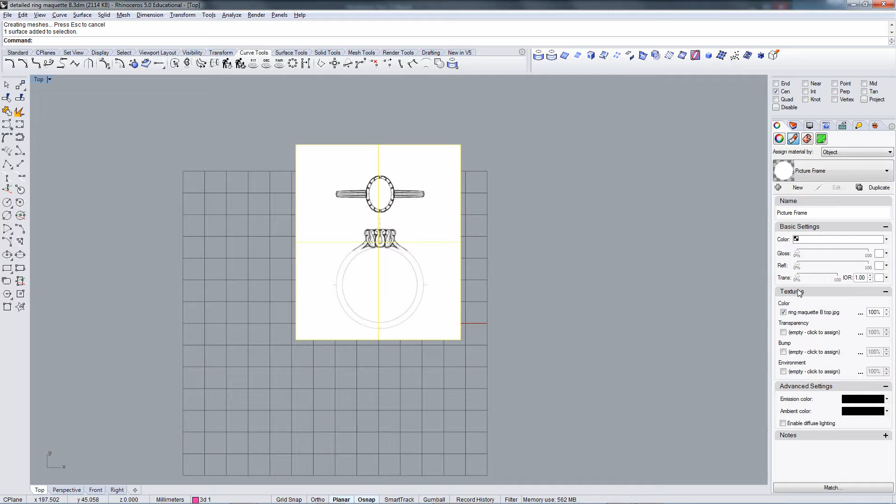Shift key, drag left to right, bring it in. Object properties, select it, go to materials, slide transparency up to 90%, more or less. And we're good to go. I need to center it. Also need to pick a layer for it. I don't want to use my magenta layer. I usually like to put my picture frames on a layer I don't like to use much for modeling. And that chocolate brown is a layer I'm not that fond of.

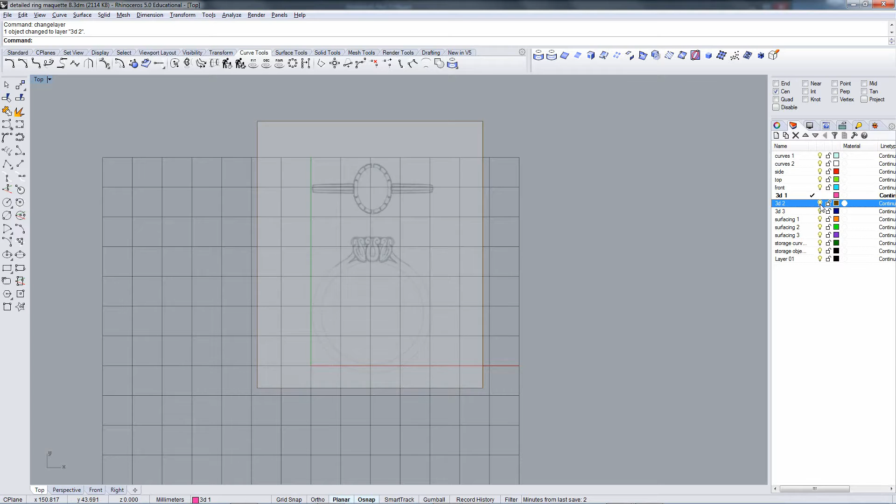Need to bring it in, center it up, and make it actual size. To do that, I need to draw the front view of my ring. So, draw my ring bore, 17 millimeters. Offset my ring for the classic 2 millimeter offset. Move it up 0.3 to create a typical profile.

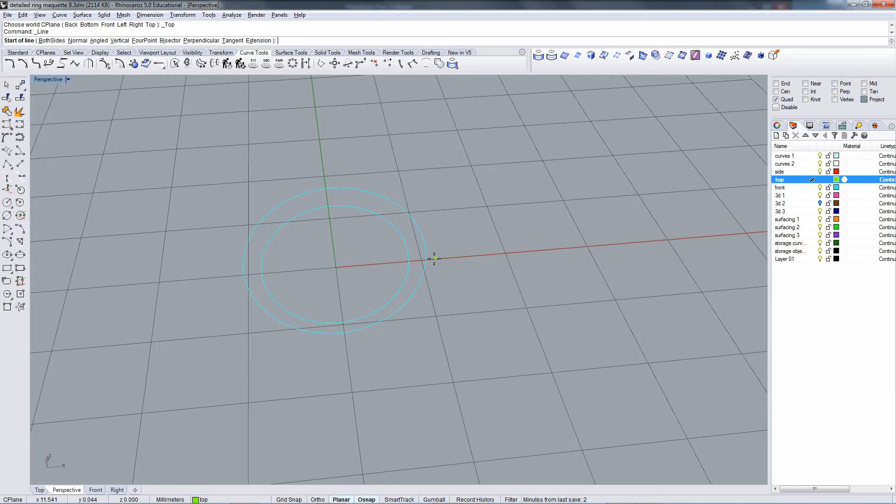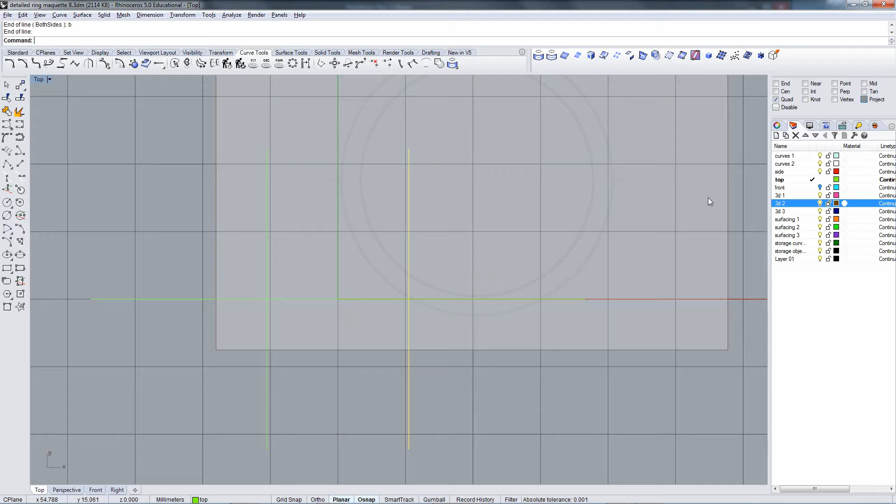Quad snap projected onto the C-plane to draw brackets showing me the overall width, both sides, and then mirror. And then a straight horizontal across construction line that I can use to snap to. I can turn off my front view now. So, with this information, I can now center up and scale my sketch.

So, I'm going to draw a box around my drawing, catching on 2 points that are consistent for me, the bottom edge here and the right hand side. The corner where those two intersect, which is right here, I'm going to use as the origin point for my non-uniform scale to scale that box and snap to accurately fit my drawing.

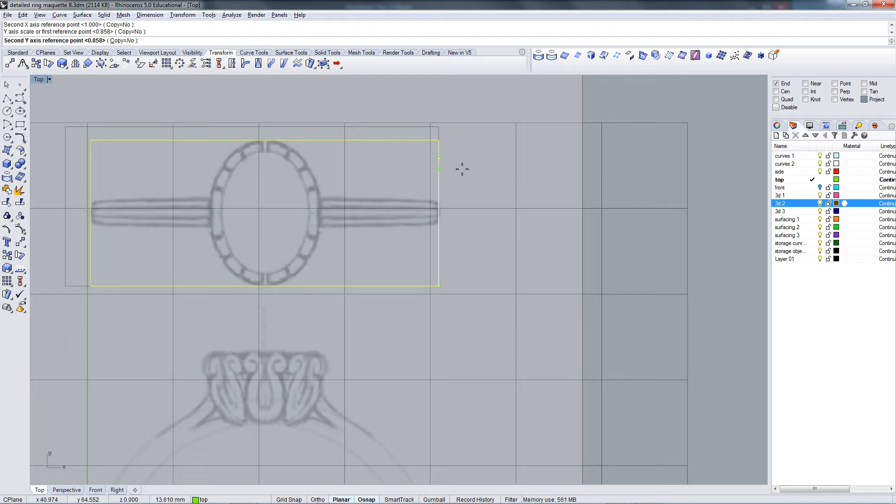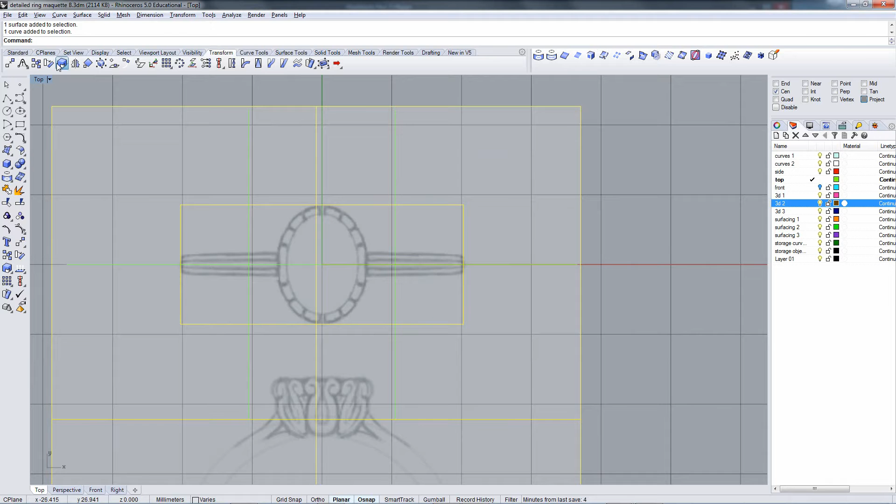And then select both the picture frame and the rectangle to move them into the center of the C-plane. So center snap, grabbing the center of that rectangle I just created to 0. And then select them both again and do a regular 3D scale, starting once again at center, coming out and grabbing the intersection of the box and that horizontal construction line and the width bracket and that horizontal construction line. I don't need that anymore. And I can lock the layer that has my image on it.

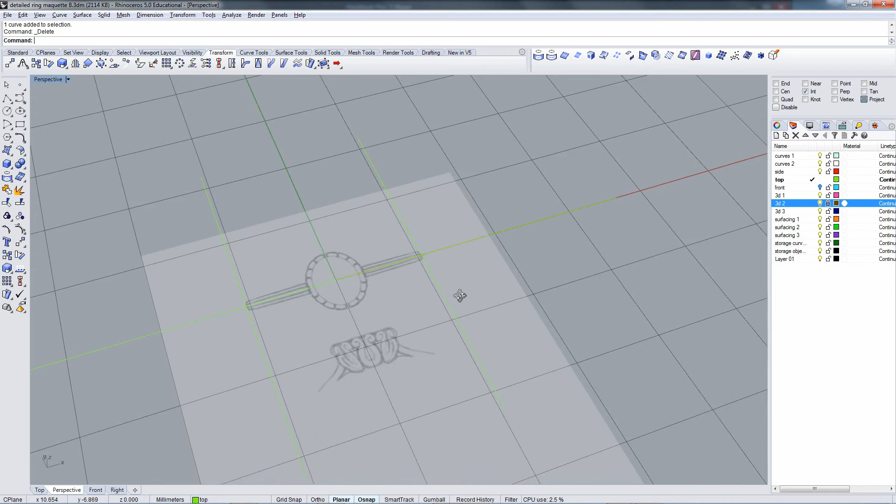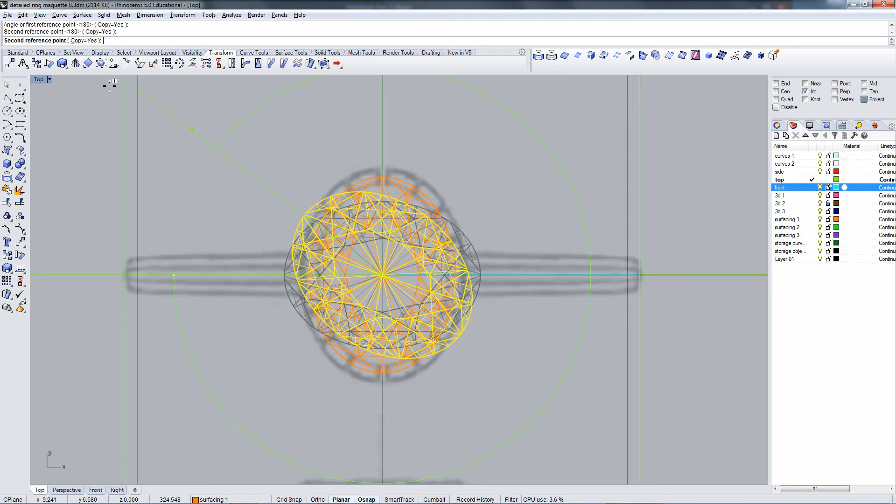I need to bring in an oval stone, so File, Import, go to where that is kept. I just need the stone. I'm going to scale and rotate that stone to be appropriate, so rotate 0 and then just 90 degrees, or shift click and shift click. I had copy equals yes selected, so that didn't give me what I wanted. Do it again with copy equals no. Shift. There we go. Need to scale this to be the proper size for my drawing.

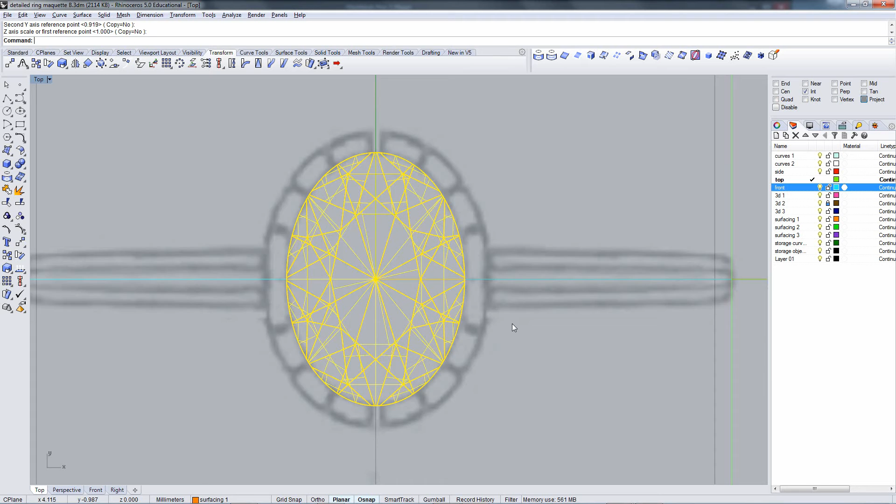Once again, I'll do a 3D scale, starting at 0, and then just by eye, capture the width. That will keep the dimensions of the depth proportion correct. And then do non-uniform scale to adjust the length here. Nothing changes here, so 1, by eye, drag it up here, click 2, Z is 0, so that's fine. Going to move that into position. Now in this case, I actually do have a front view that I can work from. So I am going to place that front view in my drawing also. So turn off the stone, turn off this for a minute.

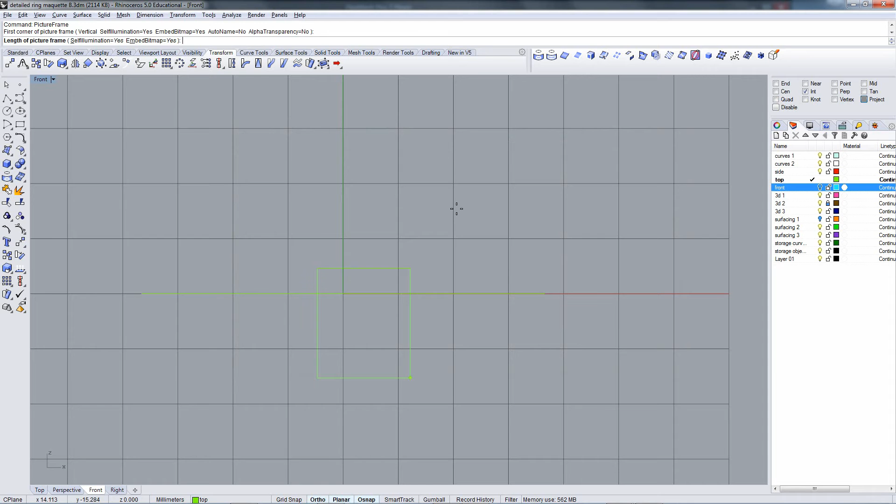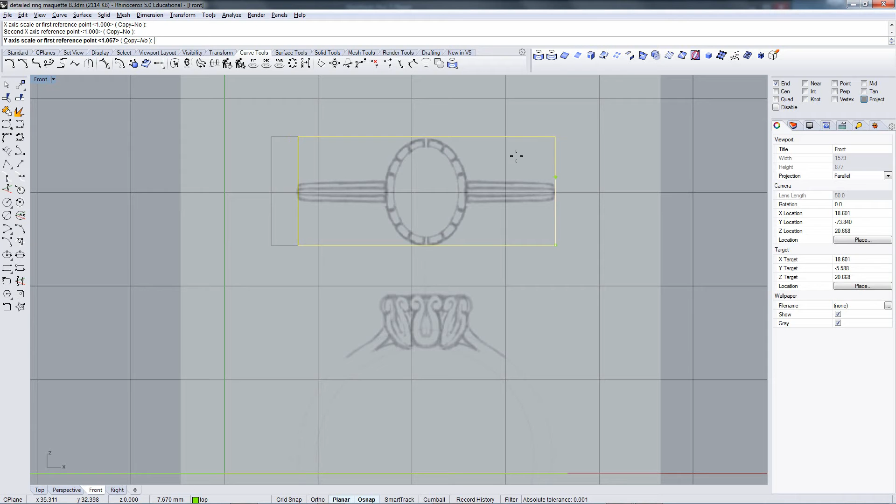Go into the front viewport, picture frame, same steps. Object properties, materials, transparency 90%. And once again, I need to orient it and make it the right place and size. Use the same steps. Rectangle. Capture two edges. Scale the box non-uniform, using this lower corner as the origin point. Match. Match. Select both the rectangle and the image. Move it using center snap to 0. Turn on my front view.

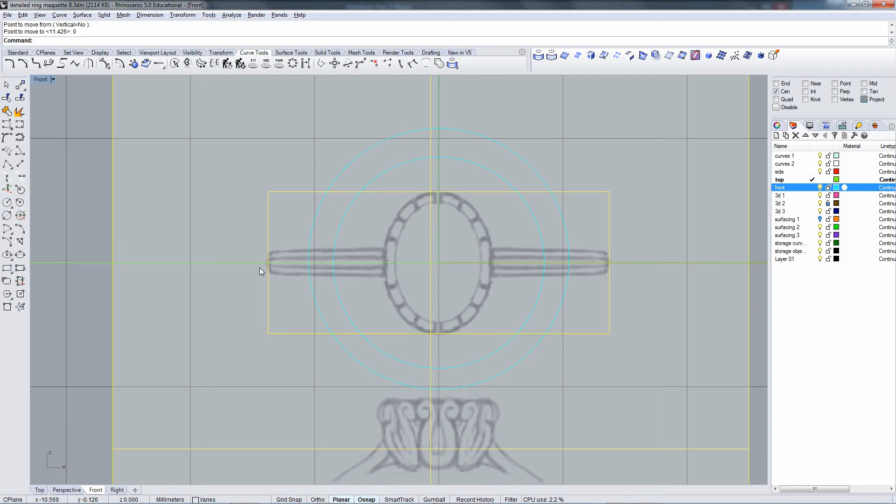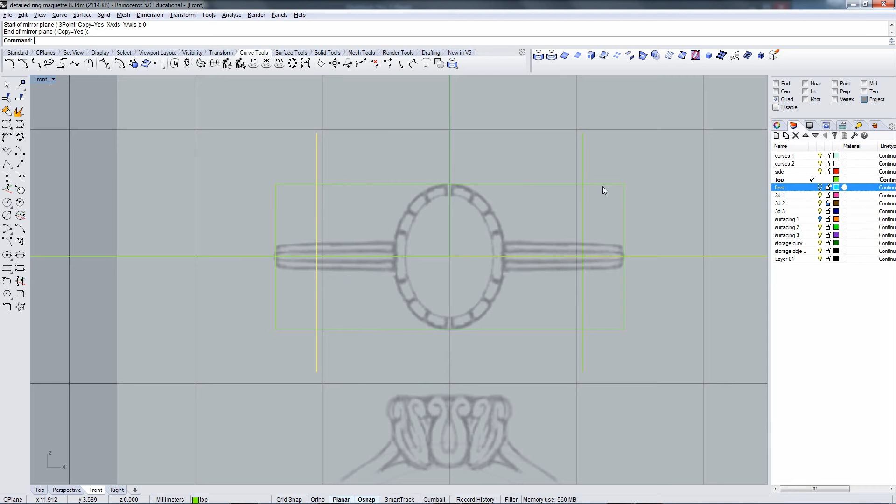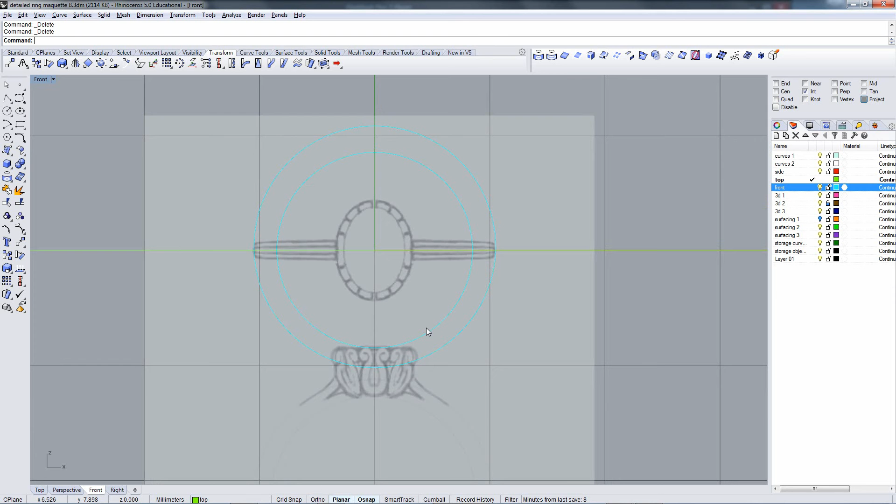It's a little bit trickier here because I do have a horizontal that goes all the way across, but I don't have a good width bracket here on the front view C-plane, so I'll draw that now. Just grab the outside quadrant, both sides, shift key to make it straight, mirror over. And now I can non-uniform scale, or actually just 3D scale, I should say. Regular scale, starting at 0. Intersect object snap for the box and the width bracket. I can now delete the width bracket, delete the box, bring in my drawing, and I'm just going to move this picture frame straight up with shift key until it more or less intersects.

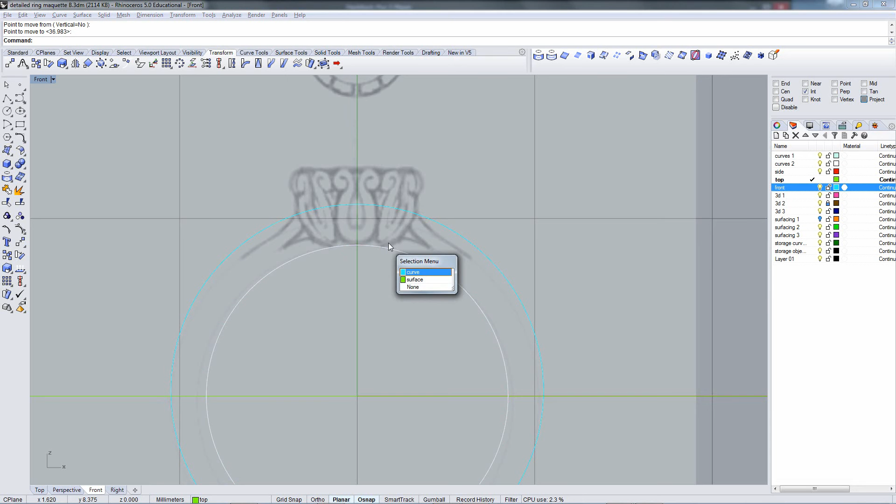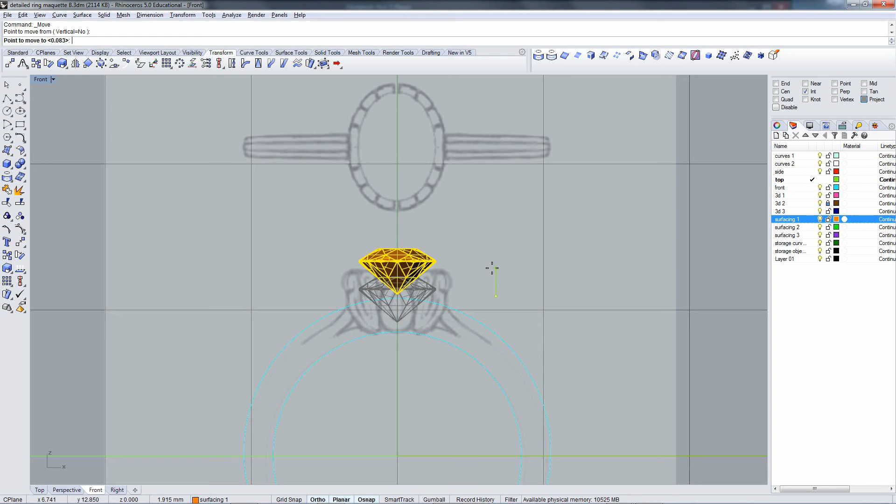Now, one of the things I'm going to see is that the designer who drew this obviously wasn't interested in my minimum shank thicknesses and what have you. So they've drawn a much more delicate sort of ring than what I'm going to want to make. And that's okay. I just have to be aware of that fact. I'm going to move my stone up in position now, where it'll make sense that these could actually be grappling the stone. Now, I would have a disagreement with the designer as to why he's doing that, and I would actually lift the stone up a little bit higher than that and actually set it up in prong.

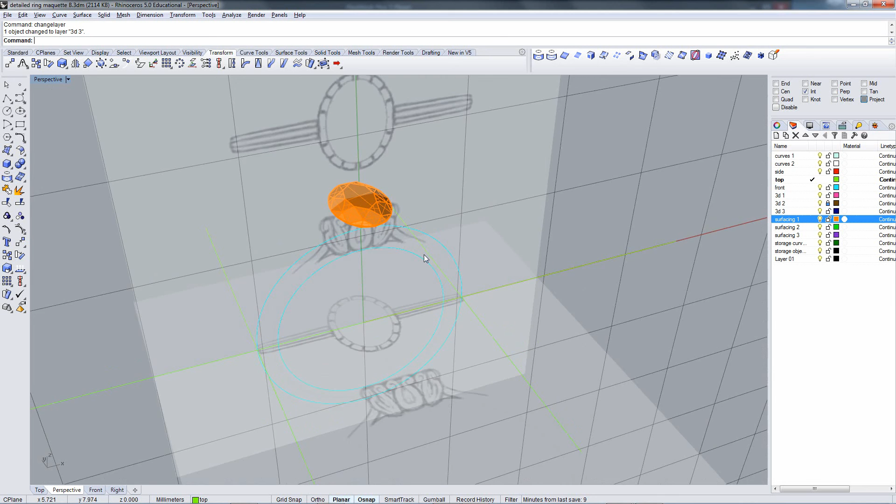Going to put this on a storage layer as well. I don't want to use the same dark brown, so I'll put it on the blue, and I'll show you why. The beautiful thing about picture frames is that they show in all the viewports. So this can start to get hairy with this showing up there and all over the place. Okay? So for now, I'm going to turn off the dark brown one and just work with this one.

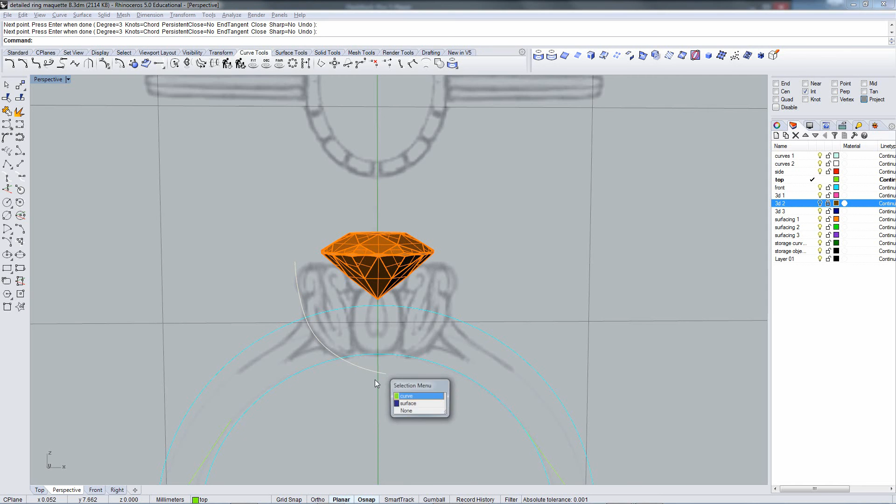I want to create a bowl that represents this basket. I don't want it to come all the way to the middle because I'm going to revolve it, and if it comes all the way to the middle, it's going to cause problems for me. So I'll go to about there. Fill it.